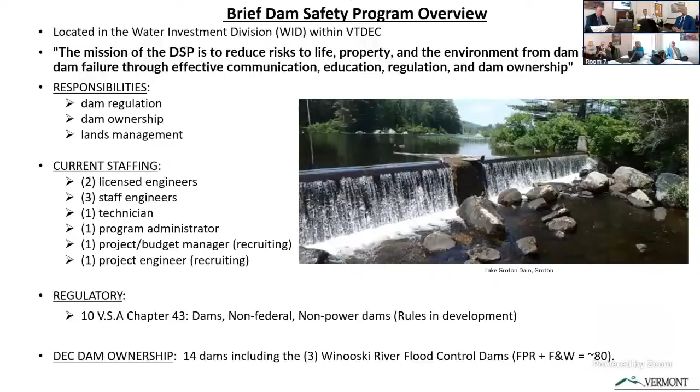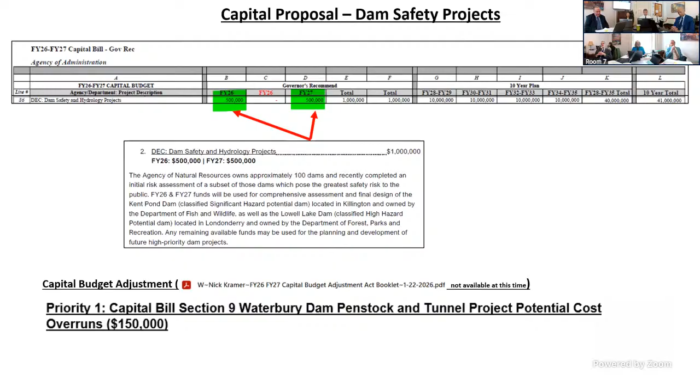The next pivot is to talk about the capital appropriations. We're actually going to go back and talk a little bit about fiscal year 23. We're going to talk about fiscal year 26 and 27, and then also talk about our capital budget adjustment for $150,000 in the upcoming slides. So this table here is basically the same table we've been presenting now for a couple of years. We used the same table last session, and the text highlighted in green are updates on the individual projects.

And how we're using fiscal year 23, 26, and 27 monies to accomplish the projects. On an overall scale, we're doing fairly well. With few exceptions, all of these projects are either in action right now or are very nearly so. We're moving through with the plans for every one of these dollars. Happy to go down by line if you'd like to get into each of the projects.

We did that for the house. I don't know if that's the level of detail you're interested in or not. Well, it's hard to see them, and okay. I don't know, maybe we have this somewhere, Scott, or Ken, I don't know. But it'd be good to have this available on our website.

Sure. Just knowing our districts, can you just point out a couple that are... Sure. I guess I can do them kind of like pods, so I go down through. Wrightsville Dam, which is just up the street here, so that one's kind of near and dear to everybody that sits in this building. That's a big one.

We are undergoing a geotechnical exploration and internal erosion study. That was a piece of work that came out of a risk assessment that we did on 18 state-owned dams back in 2024. That work's moving forward. We're contracted with GEI Consultants. We're doing the final planning phases for the fieldwork to occur this summer.

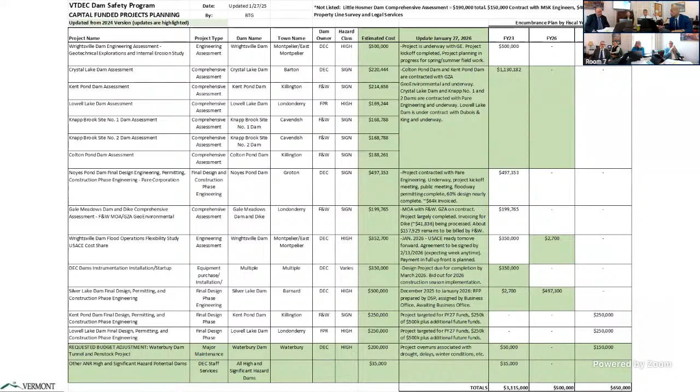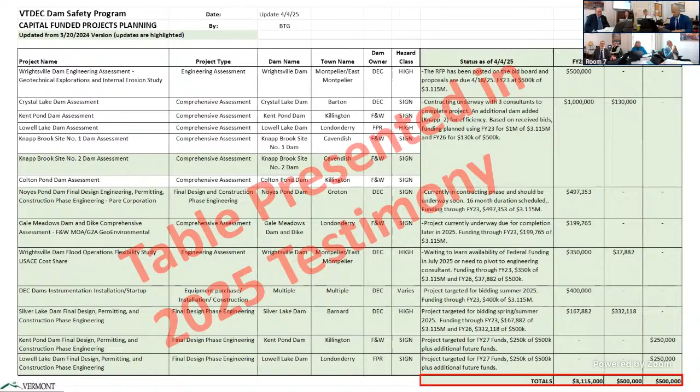So that's kind of the overall update. But you said you had a more detailed slide about the Waterbury Dam. Yep, I do. Okay, I'll move to that. Great. This was tailored for the presentation only. The House was helpful because this was the slide we presented this last year. We want to go back and forth a little bit, but we didn't need it for this group, so I'll skip over that one. So this is the slide about the requested budget adjustment of $150,000 for the Waterbury Dam

Tunnel and Penstock project. The objective of the project at its root was simply to inspect, evaluate, and do testing and analysis of the condition of the tunnel, which is a 14-foot wide, 11-foot tall, arch-shaped concrete tunnel, and then it feeds into 3 steel penstocks, which are 54-inch diameter down to 48-inch diameter. It basically conveys water from the reservoir through the dam to downstream. So evaluate the condition of those pipes and tunnels.

We had done a very rudimentary assessment back in 2018. We really had not a lot of records before that. So we felt it very important, specifically with the upcoming spillway project that we're going to be doing with the Army Corps of Engineers. This will be solely the way that water passes through the dam for a 2-year time period. So we want to make sure they're up to it. So the budget for this project was $1.8 million, which included engineering and contractors, and we're requesting a $150,000 amendment, or adjustment, to that, to both backfill the instrumentation project and complete this project.

Some of the cost overruns and challenges that we ran into: believe it or not, the fall drought challenged this project and pushed the schedule into the winter. To minimize impacts to recreation and environment, we had to schedule this project in October and November. That was the ideal time to be doing the project. And as part of the project, we have to actually raise the water level above normal levels, about 2.5 feet, and spill water at our spillway, so we can shut our tunnel off and be inside our tunnel, not conveying water through it. Oh, interesting.

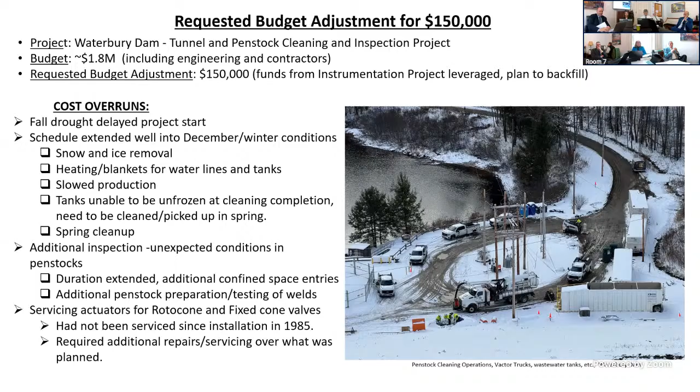This next slide is designed to show what our project maturation process is and what we're really striving to use as our work plan for these projects. We start out with that portfolio risk assessment, completed in 2024. We did a risk assessment of 18 high significant hazard dams that allows us to quote unquote rack and stack them from highest risk to least risk amongst those 18 for prioritization purposes for limited funds.

The next step is to move to comprehensive assessment. Comprehensive assessment is a detailed engineering study that includes things like hydrology and hydraulic analysis of the dams, geotechnical and structural analyses of the dams, and then development of alternatives analysis needed to address deficiencies or bring the dams up to standard and lower the risk, and cost estimates. So it sets us on a path of what are the issues, what do we need to do to fix these things, and what are the costs.

From comprehensive assessment, we select an alternative that makes the most sense based on a variety of parameters. We go to final design and permitting. We have one project in process at Noyes Pond Dam and two that are very shortly going to be in final design. And from final design, we go to rehabilitation construction. Our goal is to have one or two projects in each one of these phases at any time. At the moment, since it's a newer program, we're a little heavier in the comprehensive assessments than we are at the later stages. We're going to need additional financial support to be able to move rehabilitation construction projects through the pipeline at the pace of one a year or so.

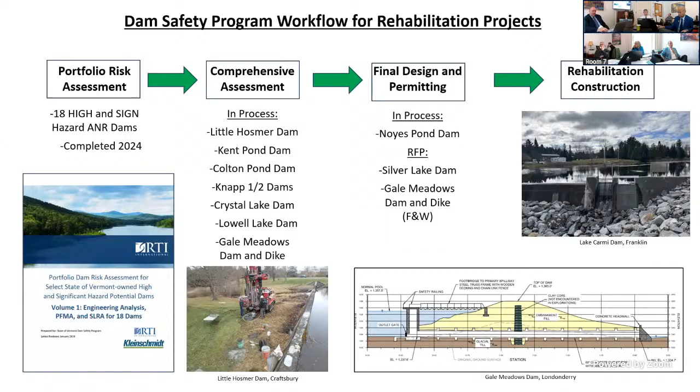Capacity wise and reality wise, we can't really move through multiple construction projects in 1 year, maybe 2, but that would be about it. So that's a reasonable pace to keep it moving, allow us to move through the inventory at an appropriate pace, and with the level of funding is probably realistic. Great. Any other questions? Okay, thank you. Keep going.

This next slide just discusses some of the challenges that we face in working through these projects and some of our plans for continuous improvement.

Two of our large challenges that we do have is the time and resources that we spend in setting up all the multiple contracts that we have, moving through the RFP to selection to contract negotiations, execution step, as well as working through legal issues, which is pretty common on the engineering contracts as well as construction contracts. Working on dams is risky work by and large.

One of the main tools that we're looking at, and hopefully this RFP is going to be out as soon as next week, is an engineering-specific retainer contract, where rather than having to RFP and do solicitations for each individual project, we're going to get a retainer contract set up with pre-qualified engineers that will allow us to much more quickly select engineers and move to engineering work.

And so hopefully that's what AOT does. Yeah, I'm surprised. I guess maybe you didn't. Yeah, that makes a lot of sense.

Yeah, hopefully it will. It's going to be a 4-year contract, so it'll probably be a bit of a challenge to get them set up initially, but once we have them set up, we'll be able to move much more quickly. It'll be a simple PO process and a simplified selection process. Should save a lot of time, because all the back-end contractual things that really do take a lot of time will be figured out just once. And there's probably not a lot of contractors who do this. It is a limited number of engineers and contractors. So you'll have multiple retainers.

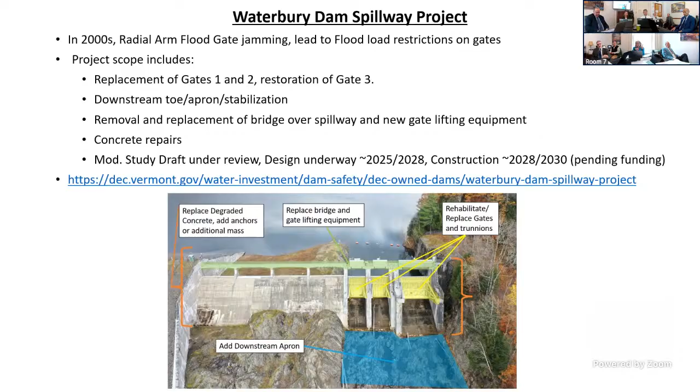And there were funding complications with this. Yeah, there were, and Emily has a slide on that. Emily will cover it in just a slide or two. Do you have any questions? These next couple of slides just show progress that's been made on the project. So the black contours on this plan are proposed conditions.

One of the challenges of this project is just getting construction access. The spillway is located at the far eastern end of the dam, away from the main road that gets up there, which comes to the western side. The access across the rest of the dam is very narrow. There's no easy way to access the spillway itself. During original construction, they actually built a road up from below, and they did a bunch of things they can't really do anymore.

So the current plan is to install this temporary, hopefully permanent road that goes along the upstream slope of the dam, loops around to in front of the spillway, and allows us to get cranes and equipment down there. It's estimated over 20,000 cubic yards, which is about 2,000 dump truckloads of material, needs to come in to build this road. But this is kind of the first hurdle, getting access.

One of the first things that will be done in addition to this will be drawing the reservoir down roughly 30 to 50 feet for an estimated 2-year period. This is a little unfortunate recreationally, but it's really necessary because we need to be able to provide commensurate flood protection that we have with an operable spillway system when the spillway system is torn apart and we're doing this project. And to do that, we need to store it by bringing the reservoir level down.

In addition, we don't want to have the reservoir level anywhere near our gates because we're going to have the whole area torn apart. We're actually in a very fragile state during construction. So we want to make sure we don't have water flowing through during that condition as well.

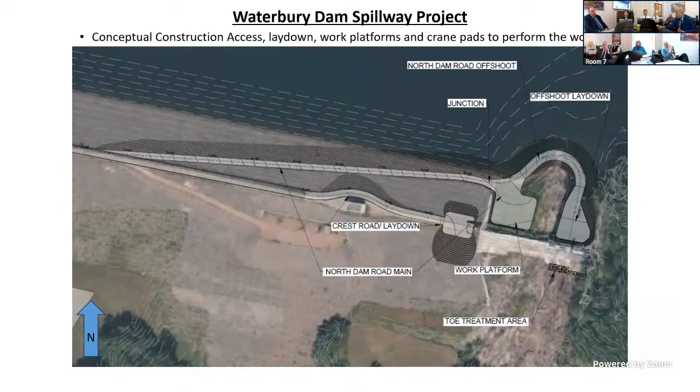These just show some schematics of the planned improvements. The blue shading is the planned improvements to the pier systems that support the bridge over the top of the spillway. The bridge now is 14 feet wide for the most part, and 20 feet wide at locations of lifting equipment. The bridge is being raised up to match the dam crest, which is a positive move and increases hydraulic capacity and access. But you can see that's a fair amount of construction.

The image on the right shows an example of what the toe protection is going to look like, to hopefully arrest that rock erosion and protect the toe of the spillway.

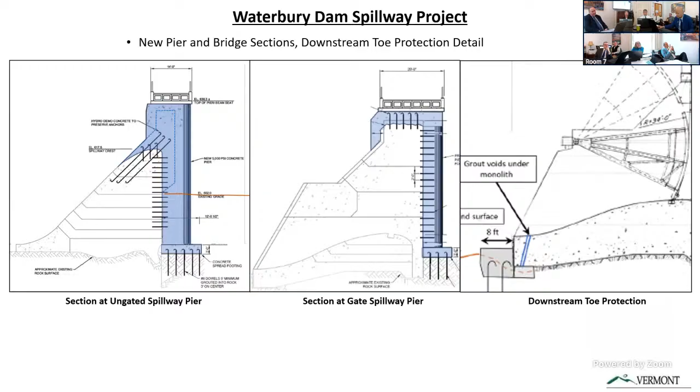This next slide might be a little difficult to follow about the gates. The image on the left is the proposed design replacement of gate 1 and 2. These will probably be designed and fabricated in a shop in two pieces, delivered to the site, assembled into one piece, and lifted into position. They operate on trunnions, which are basically big hinges, and the gates rotate up and down on them. Those trunnions will be replaced, the concrete around them will be replaced, and then the new gate will be hung on the trunnions, assembled, and made operable. That's what's happening for gates 1 and 2.

For gate 3, shown in purple and pink, that one had higher quality steel and better reinforcing, so that gate is going to be structurally reinforced instead. We're going to add about 7,000 pounds of steel to that gate to reinforce it and bring it up to code. So when you're all done, you'll actually restore the dam to its original design capabilities. Exactly.

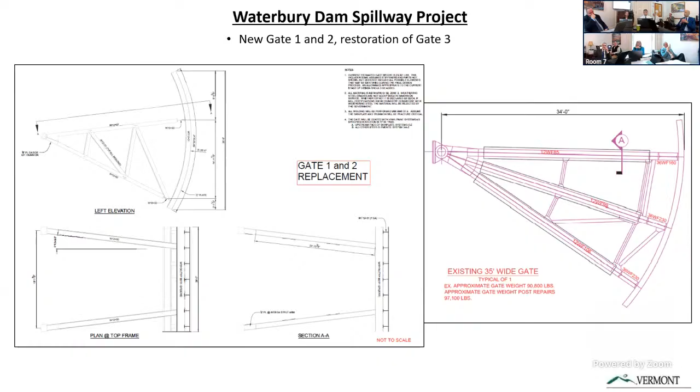And it'll last another 100 years, right? Well, at least hopefully.

The next major piece of work being taken on by the Corps and us, in the spring of the year, is a design-level subsurface exploration program at the spillway. This includes drilling cores and borings into concrete, bedrock, and soil at the dam, and also looking at the concrete-bedrock interface. It'll largely focus on areas of the spillway, particularly the piers, to understand how much concrete demolition needs to happen there to accommodate the wider bridge and the new trunnions for the gate replacements.

Again, this is planned for the spring. It's always weather permitting with this work since we're working in the spillway, and spring tends to be wet. If the spring is on the drier side, we'll have no problems; if we have a wet spring, it will challenge the work, but that's what we've done this last summer. We should have done that and not tried to do the other project — we should have reversed them, but you get to a point on things where that's just not possible anymore.

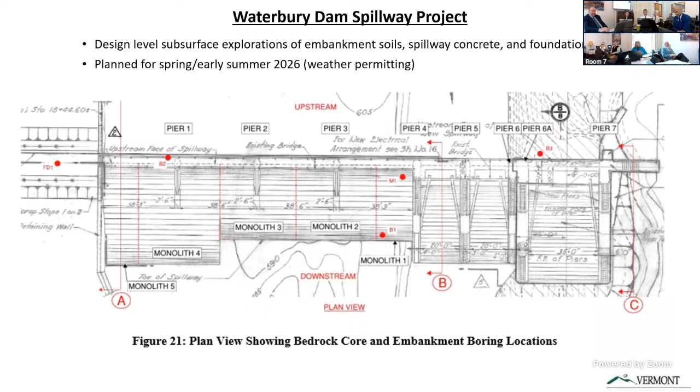Let's take a step back and talk a little bit about the tunnel and penstock project. Here are some fun photos of the work. The objective was to perform inspection and destructive and non-destructive testing of the tunnel and penstock materials, largely to evaluate condition and remaining service life.

The scope is listed here. It wasn't just cleaning and inspection — it involved confined space entries, which meant we needed to improve access into the penstock. We had to install new manholes to remove the wastewater, install drains, do some steel platform work to make access possible and safe, and put in crane systems just to move equipment around inside, since it's such a tight area.

While we're still waiting on the final report from the consultant, and they're still pulling together some results and working on that, I think the general consensus is the tunnel and pipes are in fair condition. They're certainly capable of safely handling the flow during the spillway project. However, if we want to avoid somewhat costly replacement costs in the not too distant future, we should probably be looking at a lining coating style project for at least the penstocks.

This is something we probably need to start planning for once we're done with the spillway project, and that would be to much more thoroughly clean the interior and exterior of the penstocks down to bare metal and put on epoxy coating systems to prevent further deterioration before it's too bad.

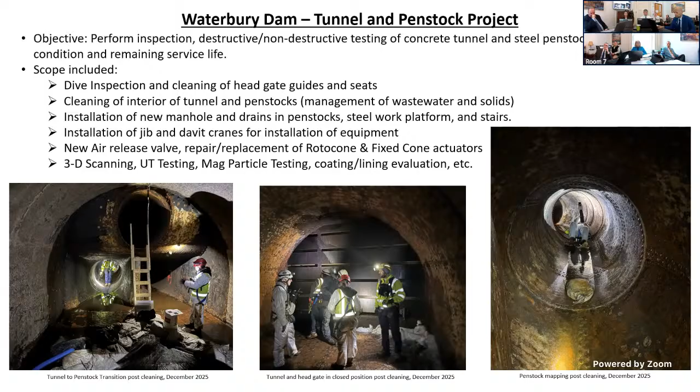This last slide is just to let you know about a challenge we had this year, related back to the spillway project. During routine maintenance that we do every year, routine annual inspection, it was found that gate 3, the 35-foot gate, the brake system that controls that gate was having trouble reliably stopping it safely. This led to a red tag issue where we had to place that gate out of service.

We put it all the way down in the closed position and activated the dam's emergency action plan at the non-emergency advisory level. Basically we contacted the downstream communities and said, listen, we have one of our three floodgates - while if absolutely necessary it's operable during a major flood, we have gate or brake challenges with it, so we're placing it out of service.

For informative purposes, we designed a new replacement with a special order item because of the age of all the equipment here. Installation was completed in 2026. The overall project cost was not particularly high at $20,000, including design, equipment purchase, logistics and installation. It took a bit to get going, but once it was in and tested, everything tested, we're up to fully operable service there now.

The EAP has been deactivated, but it serves as a good reminder that a lot of this equipment on the spillway is 80+ years old. It's near the end of service life, and its reliability is not as high as would be preferable in all cases. If we weren't looking at a $76 million replacement project in the next few years, we'd probably be replacing a lot of this equipment sooner rather than later. So we're at that point where we need to be doing this stuff.

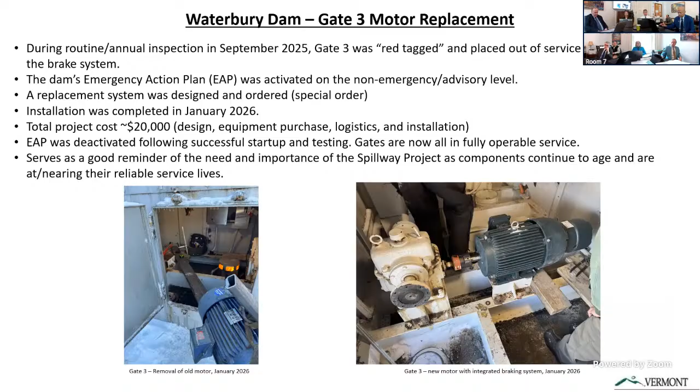I just had one more slide, I apologize. This last slide is results of an analysis that one of my staff members was able to do. This is a great example of something that when we have extra staff, these are things we can take on to great value for the program and the state.

One of my staff members did an analysis of all the maintenance and capital costs spent at Waterbury Dam from 1982 to 2025. We have even older data, but that was really the most reliable timeframe we had. We subtracted out major capital projects from this assessment, such as the $26 million seepage control project with the Corps of Engineers in the early to mid 2000s, and we didn't account for the spillway project we're working on now.

We're looking at the major and minor maintenance projects we've done over the years, and what we really need to be doing as we strive to meet not only modern dam safety rules, but to be the best stewards of this critical piece of infrastructure that we can be - hopefully leaving the dam in a better state than we found it when we took these jobs.

Looking at operation and maintenance costs from 1982 to 2025, all costs were put into current day dollars. We found that we spent, since 1982, roughly an average of $200,000 a year on these projects at Waterbury Dam. At our low, we spent $0 in one year; at our high, we spent $1.6 million.

I think our conclusion is that we need to play catch up really over the next, say, 10 years, maybe a little bit longer, but we need to play catch up on a lot of maintenance work that needs to be done.

The estimated annual need is roughly $500,000 to get us to where we need to go over the next 10 years. That's annualized, so in theory there'd be years where it's less and years where it's more, depending on actual project cost. We took the total cost and divided by 10 to get that. This is a very helpful assessment, and we're extending this to our other flood control dams as well as all ANR dams. I think we all knew in concept that we have a history of under-maintaining this infrastructure, unfortunately, so we're trying to get our arms around that and make improvements to catch up over time.

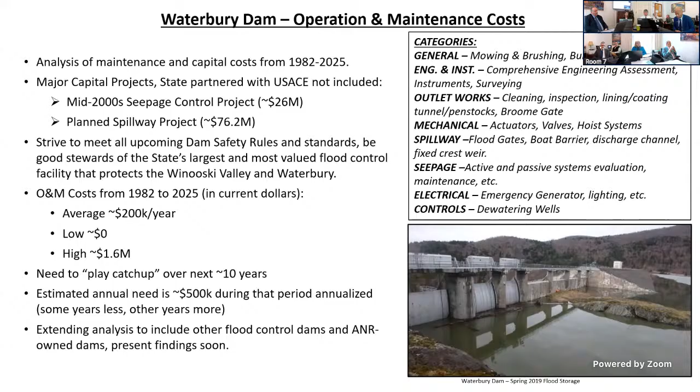So this next slide — we're going to talk through the funding portfolio for the work planned at Waterbury Dam for the spillway reconstruction project. As Ben mentioned, we have the dam safety modification study that resulted in an updated cost estimate for this project, which, through the additional planning work that had been done, allowed them to drop the cost estimate down from $92 million to $76 million.

Part of that is, as I understand it, that as they move forward in the process, the cost estimate becomes more accurate and they don't need to build in as much contingency. So that's good news that the cost estimate is coming down, and as it moves through the design process, that cost estimate will likely be further refined.

From there, we moved on to the dam safety modification study, which was a 50-50 cost share with non-federal match and federal funds. Then the cost share agreement for the design and construction phases, which we're just entering into now, was originally supposed to be 35-65 — the state paying 35% of the cost. I might have mixed that up. But fortunately,

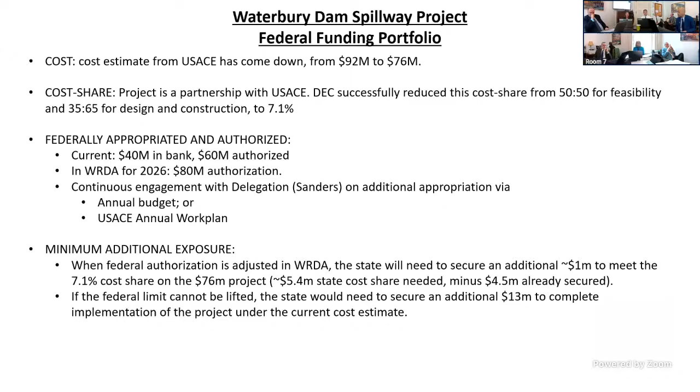Ben mentioned that there has been a little bit of a delay in the design getting off the ground. So having the slight delay in the project timeline actually gives us more time to work with our congressional delegation to secure additional resources for this project, which is good news, as long as we can continue to hold the match dollars stable for this project. And maybe it would be a good time to move to the next slide.

So right now we have $40 million that's in the bank with Army Corps, the authorization ceiling of 60 million, working to lift that to 80 million, and then working to continue to secure the additional appropriation. And on the appropriation, there's a couple of different ways that can be done. It could be from a direct appropriation from Congress, or we can also work with the Army Corps to build that into their annual funding portfolio. So the Corps itself has funding that could be directed to this project. And so we're working closely with the congressional delegation to explore options for making the funding more whole for that.

And so let's see, if we are able to increase the ceiling to $80 million and secure additional appropriation, we estimate that it would be an additional $1 million in state match that would be needed to make the project whole. We already have 4.5 million that was secured from the cash fund in 2024. And so it would be a $1 million delta that we would work with the General Assembly to hopefully secure. If that ceiling cannot be raised to $80 million, then we're looking at a $13 million delta that the state would need to work to fill.

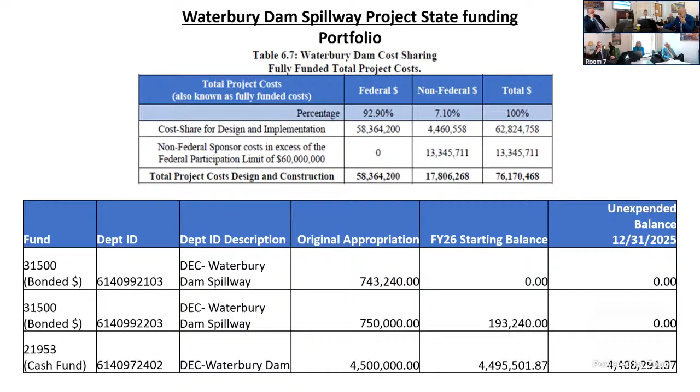Any questions or comments? Yeah. Got a couple of questions. What's the relationship between the cost of maintenance of the dam and the hydro facility? So you've got a user that benefits from the dam. And so what's their role in the maintenance costs?

So Green Mountain Power is the power producer. Back for an original project siting, my understanding is that this piece of property, prior to the dam being there, was actually owned by Green Mountain Power. Green Mountain Power was looking at siting their own power dam at this site. Turned out their contribution to the project was they donated that land to the state, who in turn donated that land to the Corps to build a project at roughly that 7.1% cost share that we're referencing today.

And that being their project contribution, they essentially secured water rights for power production into perpetuity. So they don't have a, I guess they negotiated a very favorable agreement back in the 30s and are somewhat absolved from responsibility of financing dam repairs. Okay. Then my next question, when you draw the reservoir down, you're obviously going to significantly reduce the head on that turbine. Correct. So it's going to reduce its power output. Very much. So do they have any recourse against the state? Because now we aren't providing them with the...

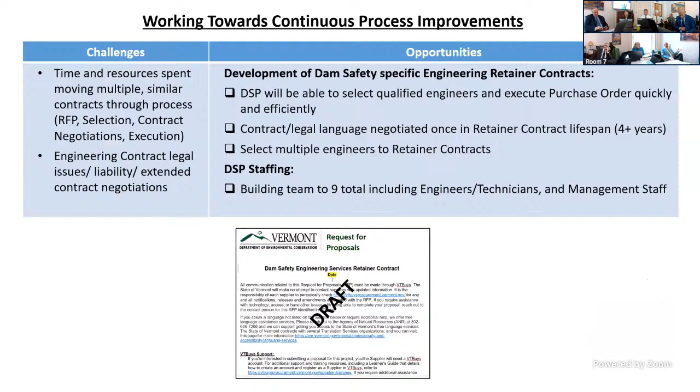Where there's potentially maybe a small increase in power production, I'm not really prepared or that familiar with what this exactly means. But when the project's complete, one of the things is that the winter drawdown will be going away. So I don't know if that impacts them negatively. They won't be able to draw down anymore, but they'll have a higher head, so I don't quite know, but that'll be one thing that will be changing for them. I'm just curious. They're certainly well aware of it. I think there are some concerns with limiting the winter drawdown even with the new construction. So those are hurdles that still need to be better understood, but yeah, that's a great question. I don't know the entire answer to the power financial part.